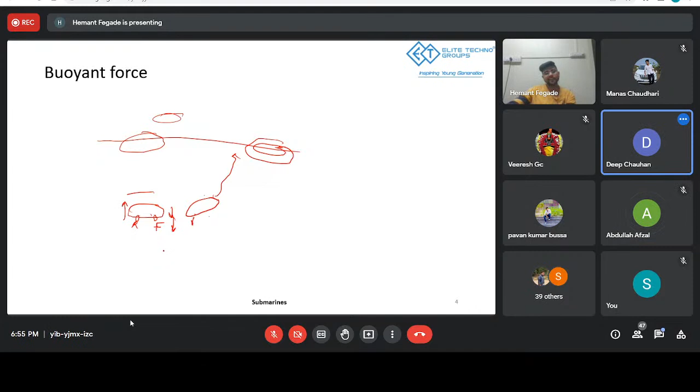Correct. So what happens is, you see this big chunk, this tower at the top. Here there are two separate air tanks. Now these air tanks are highly pressurized, and using these pressurized tanks we are basically forcing the water out, retracting the air, creating a vacuum inside, and we're basically coming on board. That way we are maintaining the integrity of the ship. We are also maintaining the diving and resurfacing phenomena, and that way we are trying to accomplish this particular dynamic.

Okay, so this is about the basics of how we are submerged into under the water and how we are resurfacing. What about the next?

Excuse me, which fluid is used in those tanks present in the tower? It's air only. It's normal air. Those small tanks are specifically designed in order to insert air in this.

So you see these walls, right? These walls are incorporating air from external means. But if you are inside, completely submerged, completely filled with water, you need to push this water out. So here there are tanks installed, through which all these four walls are opened up, and from all these four walls the water gets pushed back. Then there is a mechanism for it, like seals and everything. So once the water is pushed back, you will seal it up, and accordingly you will be able to float in and resurface. So that's the dynamic here.

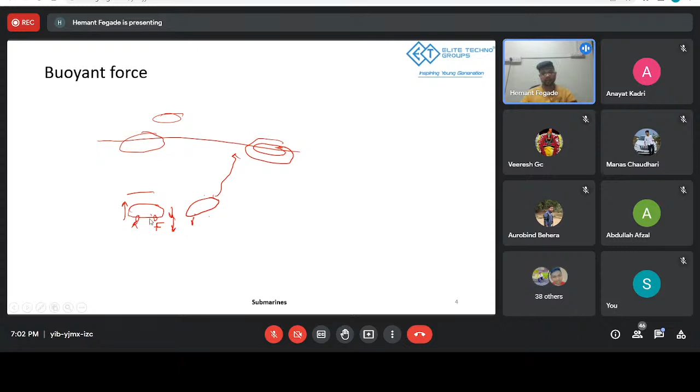Previously we only saw that there is a front and rear tank for change of angle. Even so, these rear and front trim tanks are basically used to change the angle. But your main ballast tanks are situated over here. Once you empty those out, they will reduce the weight of the submarine and try to take it upwards. So this is one step further into the detail of the concept. This is how it is done, and it is controlled with a control system. It's extremely precise, and accordingly this resurfacing and diving is controlled.

Now let's see. Yes Veeresh, go ahead. Sir, will these ballast tanks be present externally or will they be fitted internally, sir? It will be internal, it will be all internal. Okay, thanks sir.

So now another question is, how does it see underwater? Because you are at a depth where light cannot pass, or light basically won't pass due to the water. And how are you going to navigate through the waters? How are you not going to hit a boulder or something while you are underwater?

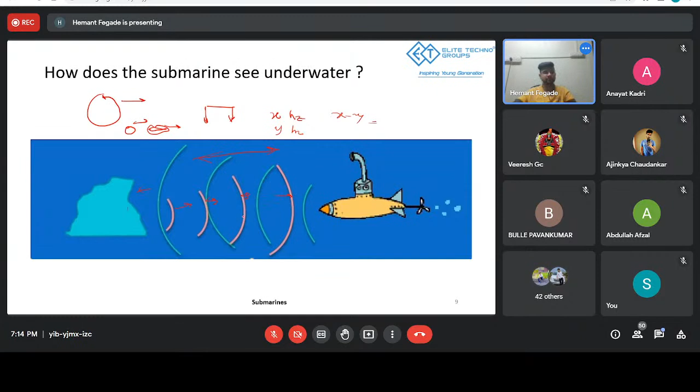So basically, you will have an equipment called Periscope. In this Periscope there are a bunch of mirrors installed at a 45 degree angle. Let's suppose this is your pipe, okay, and your light rays are coming basically from this direction. Let me just complete the drawing, just a minute. You're here, you're seeing from here. So the mirrors installed at 45 degree angle basically translate the light from this point to this point.

And it will basically capture whatever this lens sees in terms of light fragments, and that is transmitted to this stage. That's how you can see above water what is going on above water.

But in order to see this, there is a limitation. Basically, suppose, just a minute, okay, over here. If you are over here, deep under the water, you will have a limitation extending this periscope rod. You can extend this periscope rod to a certain extent. It's not always that you will be able to extend it to the top, no matter what depth you are at. So there is one limitation for this: you have to come up to a certain height in order to actually access this periscope.

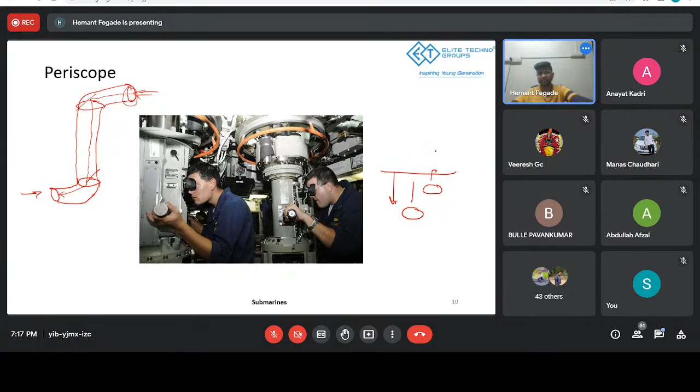This particular limitation comes forward with, and in order to eliminate this limitation, there is a device called snorkel mast, and that is basically installed above the tower, in this facility itself, so that you don't have to extend it too far. Because when you are at the periscope here, there is no personnel on board. This is just an electronic equipment side of the submarine.

There are 3 different kinds of decks in which, in the case of periscope, you have to install your control room in a very cramped space, because usually the upper deck and lower deck are cramped due to the inconsistency of shape and space constraints. So in order to install the periscope, you had to have this.

You have to install your control room here, because you need to have crew personnel at the periscope at all times, monitoring the activity at that station. So with the snorkel mast, they installed an automated device instead.

Basically it's another kind of prism arrangement, but it translates the information using a computer screen. You have a sender device or sender server, and a receiver server in the control room. That control room gets the feedback from this snorkel mast - what it sees above water - displayed in a picturized format on a computer screen while comfortably sitting in the control room.

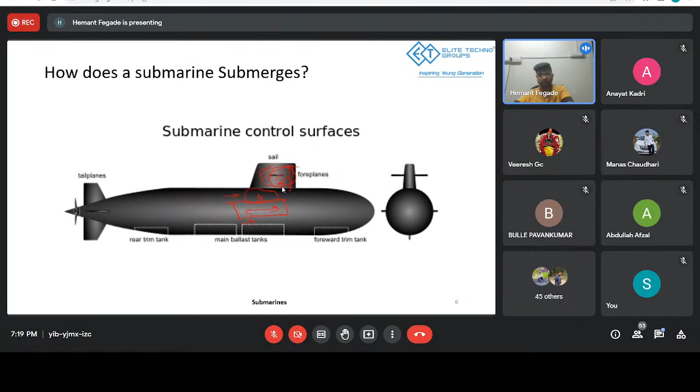Now why is this concept important? Basically, we are eliminating the constraint of having to install the control room at the top deck, and we can install it at the bottom or middle deck instead, allowing more space for execution. I know this is going a little out of context, and I'll talk about it at a better stage, but just bear with me.

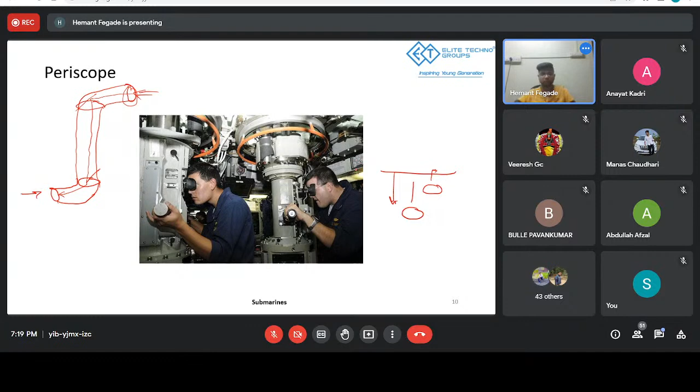The basic concept with the periscope is we want to see what is going on above the waters, and in order to predict and understand outside dynamics we use this, because underwater you might not even realize there is a storm going on above the seawater level. So you need a monitoring system, a feedback system, to tell you what's going on outside and what we should do. This is the significance of it.

What I was talking about was the control compartment - I'll again cover the propulsion system and other things later, but let me finish this part. Here you will have different systems that need to be installed, like the exhaust system and heavy electronic components. Due to these systems being installed, you will have lesser space to again install a control system or control compartment.

With the case of the periscope, we had to install it near this part - this is your upper deck, this is your middle deck, and this is your bottom deck. Due to this limitation, the size of the control room became very cramped and uncomfortable for the crewmates, since at times they stay underwater around 70, 80, even 90 days. For them to sustain in such a cramped, movement-restricted space for months is very difficult, and it becomes uncomfortable, taking a toll on both performance and the crewmate.

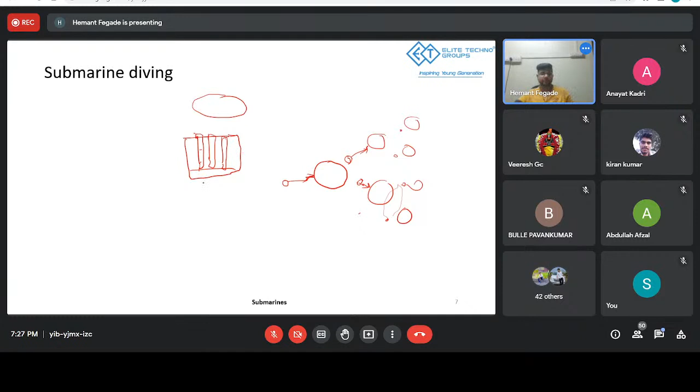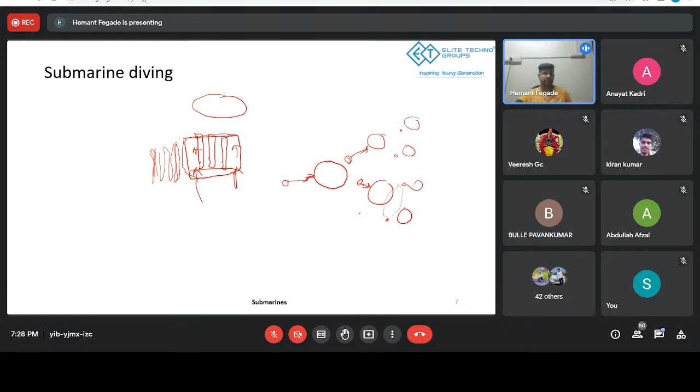This process generates an incredible amount of heat. Basically, what you will do is pass on water - it's a simple concept, like a heat exchanger. You'll pass water through these uranium rods, through this arrangement, outside of these rods, from here, something like that. This water gets heated, and then it passes down through what you can call, in this context, similar to a radiator. Basically, you will have another stream of water, or a number of tubes installed as passageways for this water to come and transfer the heat to the existing sustained water.

So basically, you are using the heated water or heated steam to generate boiling point water. Now here, remember, this water that we are passing through is highly pressurized water. We will have a separate amount of water in a tank, which is again at very high pressure. So you are boiling that water, and its temperature is rising due to higher pressure - exponentially rising, due to this heat exchange - and it will come to a boiling point. Once steam is generated, it will be at higher pressure and higher temperature. That steam is used to power a steam turbine, or steam engine, in order to generate electricity.

This electricity is used to govern all inner workings of the submarine and its propulsion system. There will be multiple units. To give you a general idea, this is one unit for the uranium rods, and this is my second unit, with linkages between these two units through a steam turbine. Let's suppose these are my two steam turbines, interlinked.

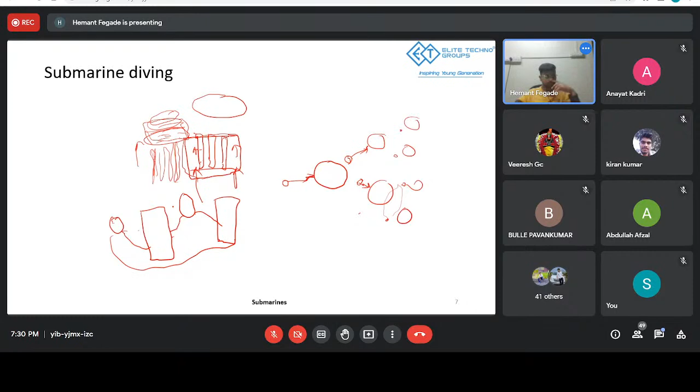There is a condensation system which condenses the water and resupplies it back into this box. So using the nuclear reactor system, you are able to power the whole submarine. What happens is we generate electricity even while underwater, without needing to pump air externally.

Still, you need oxygen to survive underwater. So what we have is oxygen generators. In this oxygen generator, consider this a container with electrodes installed, and potassium hydroxide, used as a supplementary solvent or medium. This is filled with seawater, which is desalinated, so all minerals are removed. Salty water is turned into normal water, and you oxidize that water, creating an electrolysis process to release hydrogen and oxygen separately.

This is a connection between these two tanks, and the separation is basically your negatively and positively charged electrodes. The negatively charged electrode releases hydrogen, the positively charged electrode releases oxygen. That's how you generate oxygen.

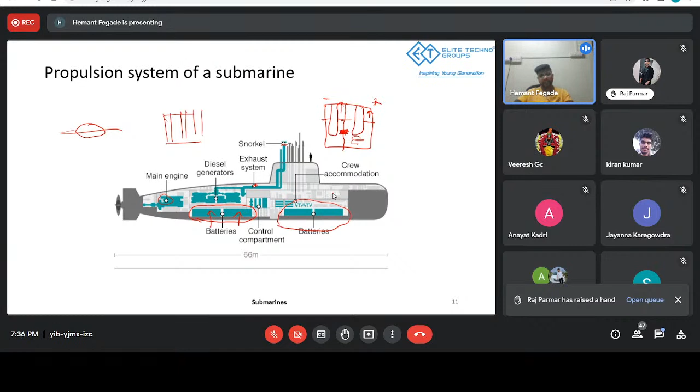Now, in conclusion, basically we have seen what a submarine is, how it submerges, how it resurfaces, how it sees underwater and also over water, what its propulsion system is and how it works. So if anybody has any questions with this session, they can surely ask me.

I think somebody has raised their hand. Good overview, Hemant. Thank you very much. Thank you, Jayanna. Thank you very much. Hi, Raj, you can unmute yourself. Okay, never mind, Veeresh, you can continue.

Sir, what is the minimum time duration required for the submarine to immerse in the water and again resurface to outside?

It depends on which level you are going at actually. It also depends on how fast you are able to fill the tank up and control it. So there are a lot of factors involved in this. Basically, you need to control the pressure of the tanks. You need to also control the valves precisely, making sure that the water is gushing in inside the vacuum that we had, and at what speed the water is gushing in, which also needs to be understood in order to prevent it causing any damage or impact to the submarine. Then again, it depends at what speed you want to go, and accordingly there is a regulated system which controls this ballast tank dynamics. So I'm not sure to what amount of time it will take to deep dive, but surely once you start filling up the tanks with water, it almost immediately starts sinking down. So it's not like a long delay.

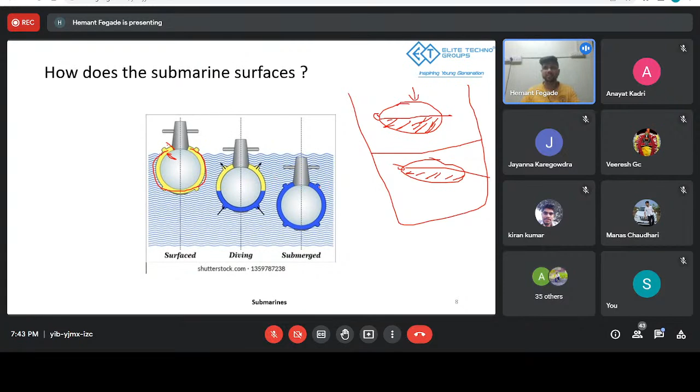So basically, it doesn't matter if your submarine is wet or dry. It will add a few pounds, maybe a small amount of weight, but it is still within their calculations itself. So to answer your question, it doesn't affect it. It's a submerging and resurfacing phenomenon.